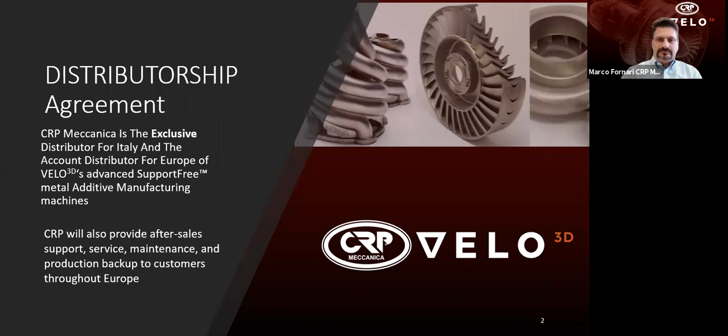A quick brief on CRP Meccanica: we have 50 years total of experience in rapid manufacturing, CNC manufacturing, as well as prototype casting and sintering for casting. We have 20 years experience in the metal additive field, and we are recently obtaining the AS9100 aerospace certification. We are already ISO 9001 certified.

Our history in the metal additive field begins in 1998 with this lovely gearbox that you see here, completely made out of titanium cast with the sintered lost wax molds that we helped co-design with our clients. We had the molds prepared, sintered, and then sent for casting in the United States.

So we've been in the game of sintering and additive for quite a while. The mentality is there. That's why we decided to partner specifically with VELO3D, because they are one of the most cutting edge partners in the metal additive world today, as we had been back in 1998 when we produced the very first titanium, basically 3D printed transmission gearbox case.

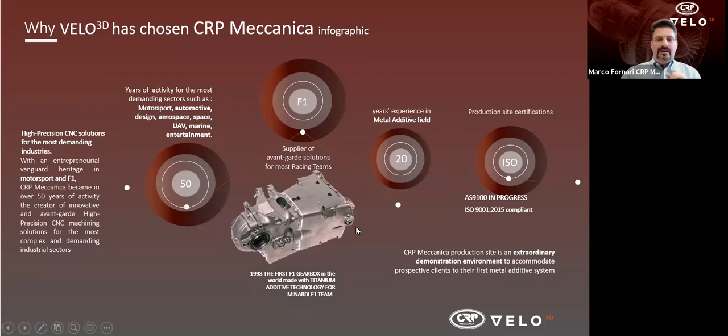As I said, many of our customers are in the motorsport field. You will recognize some devices here, and we've been basically pushed throughout the years into more and more complex parts. As I like to say, we've been forged in pain because the requirements of these customers are extremely high, both in timeliness and precision and performance.

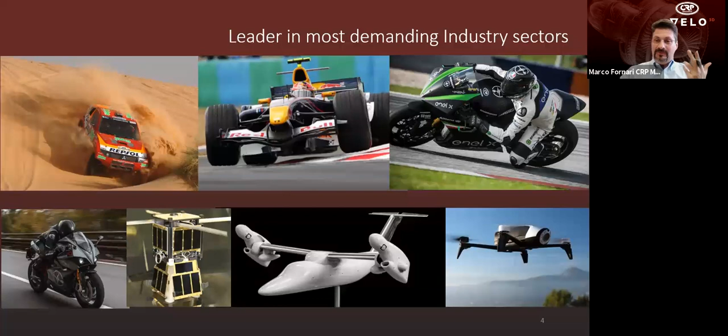A quick overview of our internal capabilities. We were born primarily as a machining company, where today we have a total of 16 5-axis milling machines of the best brands. We have 3 CNC live tool lathes, 2 conventional lathes, 3 EDM wire and sinker machines to complement all the other machining operations. We also have an in-house certified titanium welder, and we have as many as 4 active inert welding chambers where we can weld titanium, which is notoriously very difficult to do.

We employ the best software in the industry with Hypermill, GibbsCam and Cimatron Elite for our CAM software, and Autodesk Inventor and CATIA version 5 for our CAD programs.

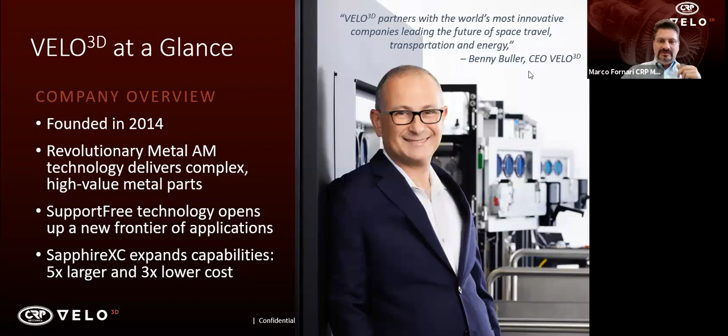And here it is. We decided to partner with VELO3D, which is a relatively young company but an absolute leader in its field, for their revolutionary support-free technology, which will be the buzzword throughout the presentation because they deserve it. We will be discussing their capabilities and what they can do for you.

This is a slide I've been allowed to show to the world because it's been made formal and official now. VELO3D has supplied SpaceX as much as 22 of their machines within the last 3 years. So this is the number one customer that they have, and everybody knows who SpaceX is and what they do.

The engine you see in front of you is the revolutionary Raptor engine used on many cutting edge of their boosters, which employs heavily additive components made by VELO3D. Everybody understands the reliability and the critical parts involved in rocket engines like these, and the choice of VELO3D speaks a lot to their performance.

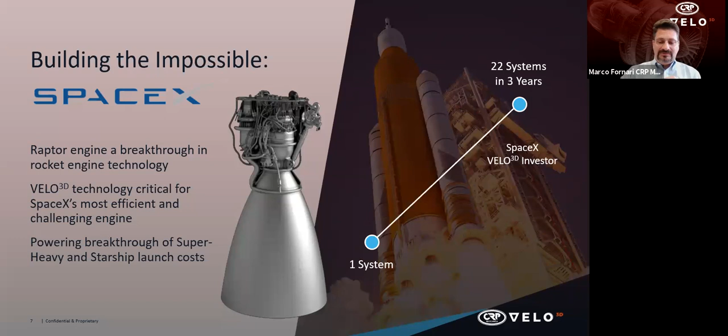Another happy customer is Honeywell, which is in the process of qualifying VELO3D's machines for use in aerospace components. Qualification of these machines is usually very stringent and tedious, and the fact that Honeywell is pursuing it speaks to the high degree of quality and confidence they have in this supportless technology.

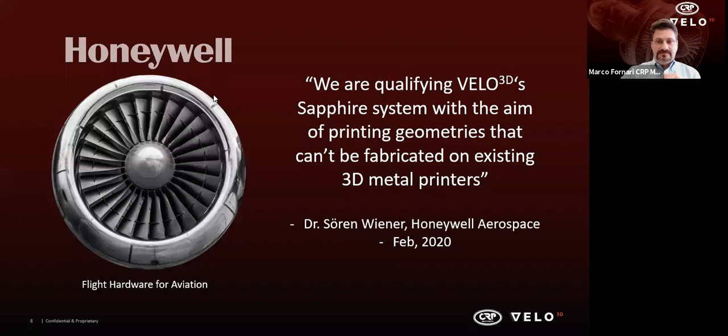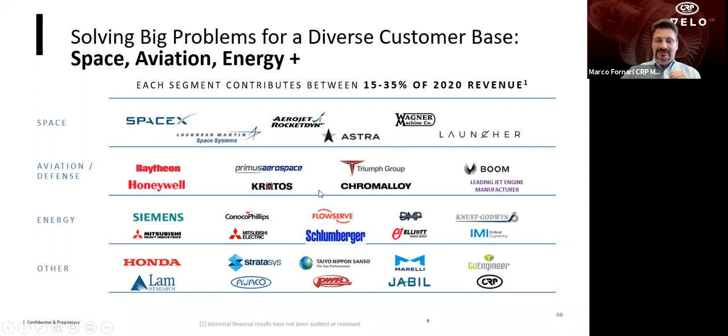And no compromises on design. This is the main point of this presentation, meaning that with the help of CRP Meccanica, we can help our customers understand this new breakthrough in technology and understand that they are no longer limited by the compromises of obsolete and current additive machines, but now they can release their designs far more than they ever have before. There may be some coaching still left to do overall to understand this technology, but now with VELO3D, you can finally afford to make shapes and geometries that were before forbidden to do.

And we have a manufacturing network which is live today, mostly based in the United States, to which we have access. So we can quickly direct all your requests to the appropriate manufacturer with the appropriate materials, with the appropriate machine, of the several machines that we will illustrate shortly.

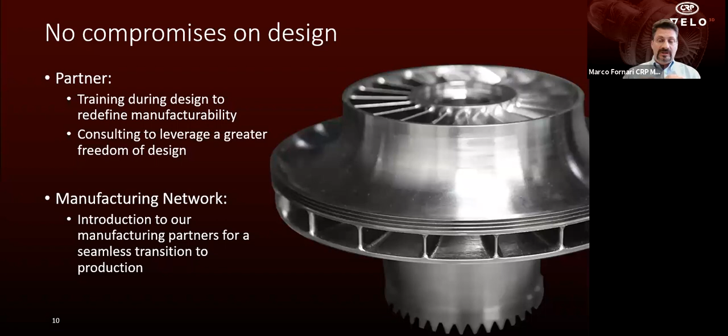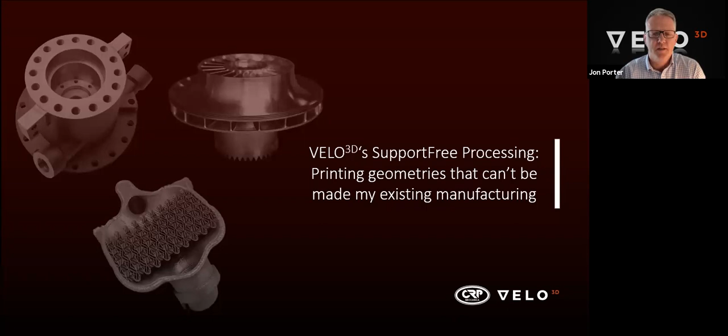Let me move on to the next slide and take a high-level view of what laser powder bed fusion is. I think we're all familiar with the phrase 3D printing, and it's essentially the production of a three-dimensional component through a series of two-dimensional slices. This is typically managed in a manufacturing process where there is a piston inside a chamber, typically in our case a round chamber, and that powder inside the chamber is laid down through a recoating process. Typically we work in the VELO machine at 50 micron layer thickness.

Each layer is then melted in the strategic position of the two-dimensional section you're trying to create using a laser. In the case of our machine, we have 1 kilowatt laser capacity, with 2 lasers working simultaneously. Once that laser has melted that new layer, the process then repeats: the piston steps down, another wipe of powder is put across, and the next two-dimensional section is fused and welded to the previous layers lying below inside the machine.

I'm about to show you a video now, and before we go to that slide I wanted to explain a little about it. There are two items in the video. The first shows the manufacturing of a reasonably large, complex component, stitching together a series of photographic images to demonstrate how quite a large part is built vertically. All you're seeing is the outline of the wall thickness, because as Marco mentioned several times, we're able to build parts like the one shown in the video without any supports, and you can see as the part is generated, there are no supports present.

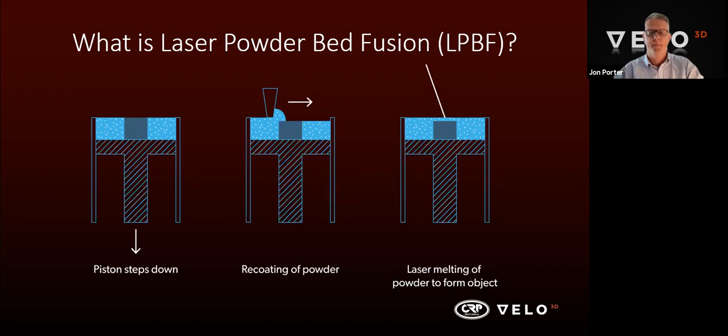The second part of the video is really quite cool as well. This shows our ability to build parts within the AM system, within the VELO system, that are unsupported or not in any way coupled to the build surface or the build plate. These parts are built free-form and standing within the powder, allowing you to build them in layers and subsequent layers on top of one another. Again, it's a unique attribute of the VELO process.

So if we could just take a look at the video, that would be great.

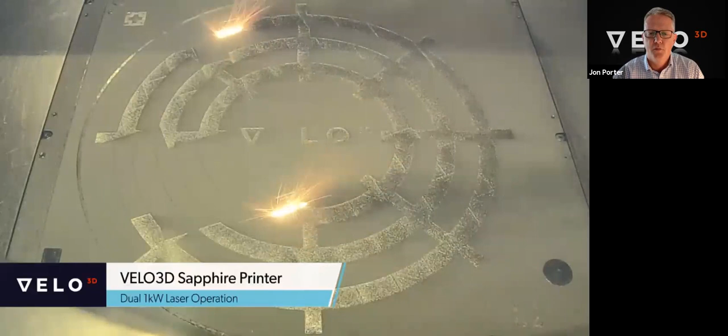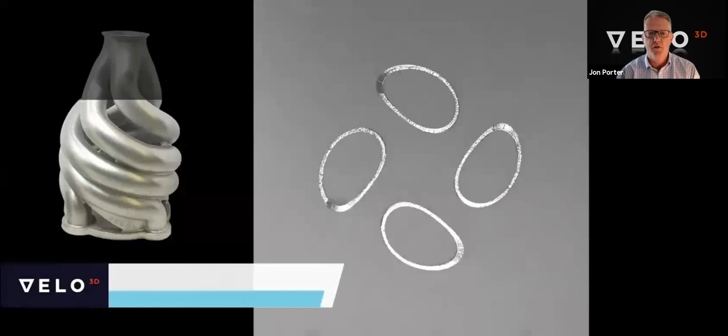Two 1-kilowatt lasers performing the initial build sections on the part I was trying to describe. You'll see now we'll move into looking at this part being built through a whole series of those two-dimensional sections. There is no support. All we are building is the part. We're not building any supports within the process.

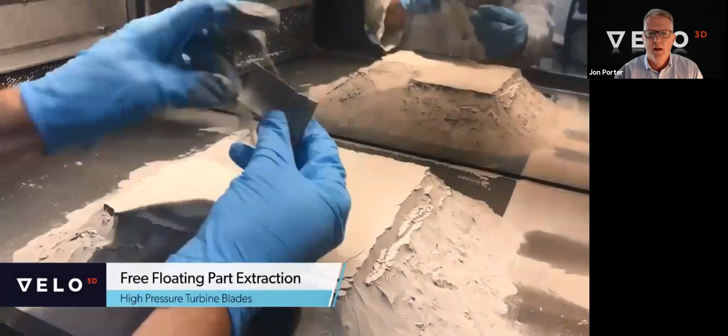Second part that I mentioned, which I think is absolutely fantastic: this is free-floating parts within the build. A high-pressure gas turbine blade, unrestrained, unsupported, just supported essentially by the metal powder that sits around it. A unique attribute of the VELO process.

Supports, we've already mentioned them a number of times, and it's worth explaining why they're needed. The process is essentially rapid expansion and contraction of metals. We're using a laser to melt small sections of powder very quickly, and that presents a range of internal stresses which can manifest themselves inside the part.

So we have a desired outcome, a little archway that we'd like to produce, and if those internal stresses are allowed to manifest themselves inside the part, invariably they will come into conflict with each other. The outcome, without any supports in place, is that the part will fail and deform in the way shown in the central image.

So the way most parts need to be manufactured through additive manufacturing is to put in place supports, or as we could also refer to them, anchors. These are the little items shown in red on the image on the right. They're about anchoring the component down and making sure it remains stable during manufacturing, and these supports have to be added and then removed as part of the post-processing techniques.

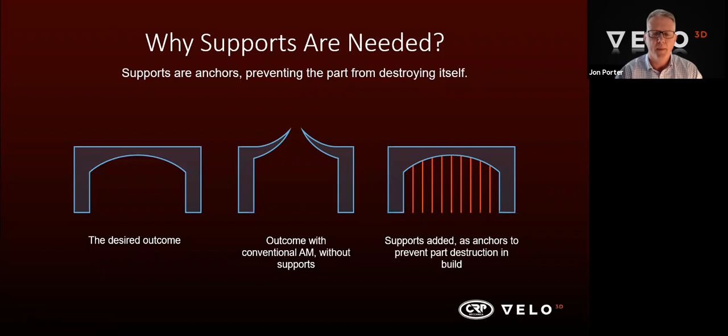So this is really where we start to stand out. Shown in red, you'll see a component like this, a shrouded impeller from one of our customers - a reasonably large component. Conventionally, this part would have to be supported.

Now there's a range of supports you can see there, and you could argue that the supports underneath the component are reasonably easy to get to. Once the part has been produced, those supports are reasonably easy to remove. But you can also see there are supports inside the flow channels, and those are extraordinarily difficult to remove.

Not only is removing them time intensive and labor intensive, but you're damaging a critical flow surface. So it's an undesired outcome in the production of parts just like this.

Looking on the right, this is simply the alternative solution we provide. We would produce that part without any supports in place. There's a small external support on the outer diameter, but that would typically be post-machined away as part of the final machining process. This is a process that could be applied at CRP, whose bread and butter business is producing high tolerance parts.

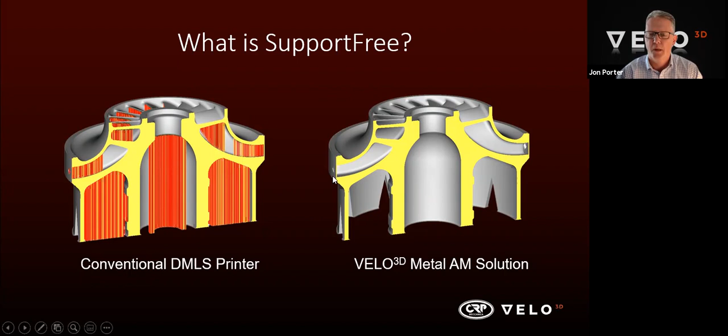So how do we do it? We work with CAD data. Our software doesn't accept STL files, which are normal within this industry - we need step files or CAD data because we need to interact with that data and apply a series of steps within our own flow software.

We have a product called Flow. What it does is look at the component on a feature-by-feature basis, and it applies one of up to about 25 different build profile recipes that we have. So if it sees a vertical wall or a low angle wall, we have a recipe for that, and the flow software will apply it.

As the part is being built, that recipe is in place to build that feature without supports. But as the part evolves, for example going from a vertical wall into more of a bulk section, the recipe will change again. What we're typically able to do is fully exercise the 1 kilowatt capability of our lasers and speed up the manufacturing process because we're just laying down bulk volumes of material in the final part.

This part you see here - you'll see it again later in the presentation - but it's important to point out that the part you see is as made, so it hasn't received any post-processing whatsoever. The quality of the surfaces we're producing, I think you'll agree, is outstanding.

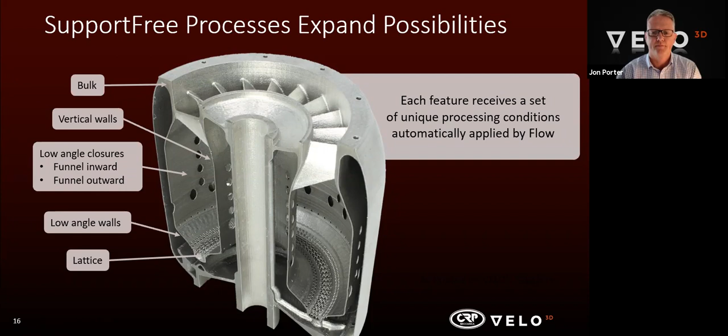So we present our business and refer to it as a full stack. What I mean is that we not only provide the printer, we provide the supporting software around it. It's important to realize, as I've mentioned, that we need the CAD model, and that would be interpreted by our flow software.

What we're essentially doing is prescribing the build process, and that's what the software does. That prescribed outcome is executed and manufactured inside our metal printer, the Sapphire printer, which is shown there. Allied to the manufacturing process are a whole series of sensors inside the machine.

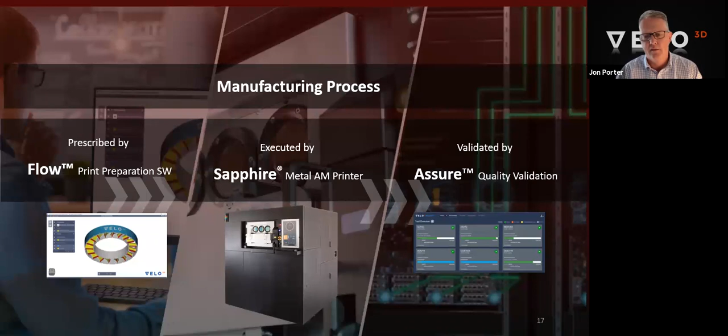So just over 900 sensors are currently on board, including the onboard metrology for the machine to self-calibrate before each and every build. Those calibrated sensors are then used to derive volumes of important information for you to validate the parts you've built. So we have a second piece of software called Assure, and what that does is centralize all of that key manufacturing data into a single point and provide validation of the build.

So we have a standard Sapphire machine, shown in the previous slide, that has a build volume as shown there. We have a round build plate, which is slightly unusual, and it's 315 millimeters in diameter and typically working to 400 millimeters in the Z direction.

Now, what we've also done is taken the goodness from our original machine and stretched it out. So we also have the same diameter build plate, but working at 1 meter in the Z direction. This has been particularly useful for some of our customers, particularly in the oil and gas industry, providing a reasonably unique working space for very long, large components typical of some of the key sectors we're now supplying into.

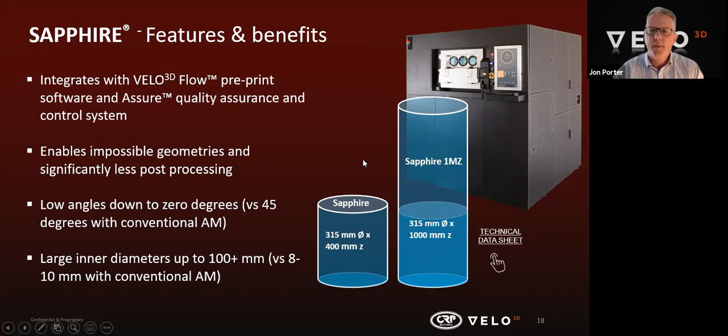If we could just take a look at the next slide, that's great. But more exciting than that in some respects is the future product. We're always excited about what's coming next, and that is the Sapphire XC, where XC stands for extra capacity. It's a much larger machine, physically larger because it has a greatly increased build space internally.

We now have a build plate, remaining round, but it's 600 millimeters in diameter now, and in the Z direction we can manufacture parts up to 550 millimeters. Now we've had to increase the number of other things, primarily the number of lasers. We now have eight 1 kilowatt lasers in this machine, and they improve the productivity no end. In early trials, it appears we're getting an increased throughput of at least 4 times that of the standard machine.

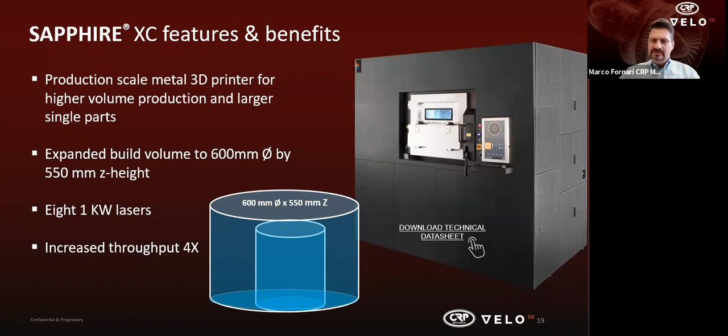Yeah, that is absolutely amazing. I very much look forward to this XC being released, I believe third quarter of this year. It's coming, probably maybe fourth quarter this year into early part of next year, and the interest in the machine has been outstanding. We've received a number of reservations and pre-orders for the machine. I can't go into exact numbers, but it's extraordinarily exciting and we're very happy with what's going on.

Yeah, I can't wait to go see it with my own eyes in California as soon as it's possible. That'll be really an outstanding machine, which takes us to a point: a machine is only as good as the products you can make with them. And a good product needs to be of good quality. How do you track that quality?

So far, many of the additive systems have relied on outsourcing processes just like X-ray inspection. Well...

The VELO3D software package, as Jon mentioned, has this package called Assure. The Assure quality control system is an all well-rounded quality control suite that does several things.

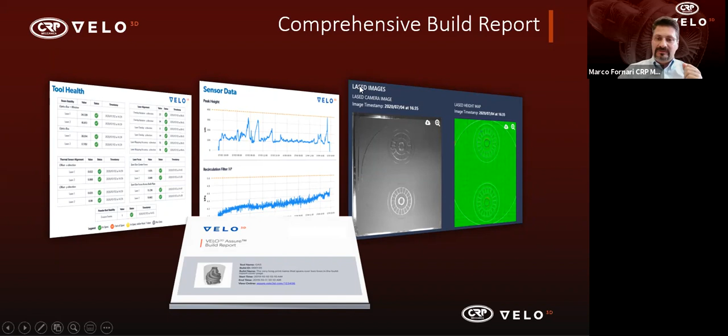This is the height mapping part of it. And then we will go back to the full build report that Assure actually is able to generate for you. So every part can receive a build report, which is fantastic. So back to the height mapper.

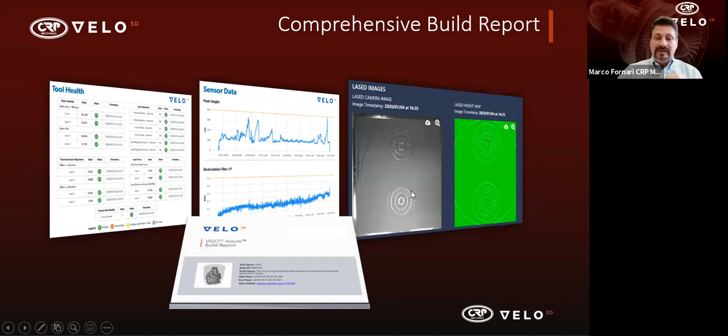The height mapper is a special sensor developed in-house by VELO3D that is able to record in XYZ the powder bed within an accuracy of a few microns, as little as 1 micron in Z and 5 microns in XY. This is an amazing feature that I don't believe anybody else in the market has, a 3D scanning feature of your powder bed. What it does is take a regular camera image and a 3D relief map of your powder as it's being laid, after it's being laid, and after it's being lasered.

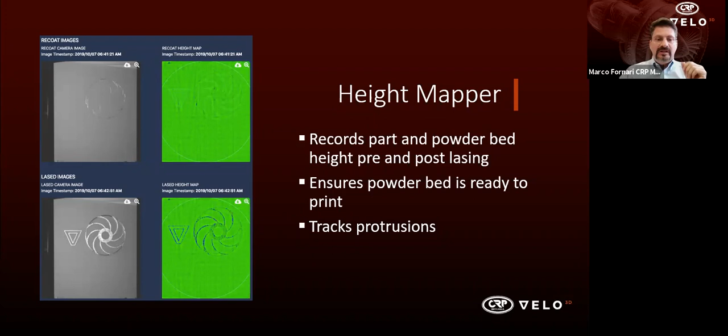And that's why you need so many supports tying everything down. Well, with VELO3D, now you can not only be much more aggressive with your 3D prints without supports, but also you can check the health of your part as it's growing. Every single layer is recorded, and as it's being recorded, a 3D model of the imperfections that may lay inside of your part is being mapped.

At the end, when you want to create your report for that part, you may go and check out the various predicted porosities that have happened in that part, to further adjust your model or your processes for the next part. So this is an incredibly powerful technology.

This is the kind of thing that builds confidence in customers that are maybe a bit on the edge about adopting additive technologies. With a quality suite like Assure, this gives great confidence to designers on the design side, but also to quality managers in the quality department, because it gives you, as I said, as a control freak, great understanding of what has happened in your part as it was growing, so you may change it and better it next time. This is truly outstanding.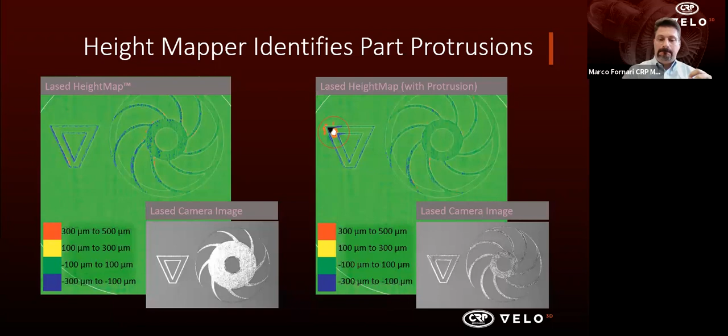Materials. Well, all the classic, most high-performance materials are offered today. So obviously grade 5 titanium, Inconel 718. This is aluminum F357, also known as A357, basically an AlSi7 alloy. Hastelloy X, which is a nickel-based super alloy. And then coming soon, the famed Inconel 625, for which I received a request today, and Scalmalloy, for which I received a request yesterday. So I really hope that Velo releases these two materials, because I have customers literally asking for them as we speak.

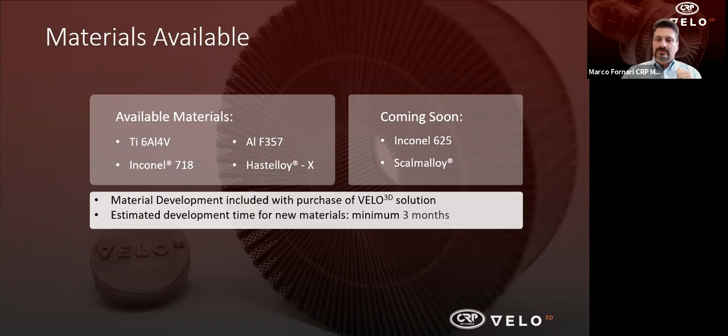The material developments are not finished here, because with the purchase of a system, VELO3D, within a minimum of 3 months, will develop material of your choice within these major categories. So say, for example, you're interested in absolutely high performance parts in titanium 6246 or 6242, which is a high temperature titanium alloy. VELO3D may develop it for you free with the purchase of the system, of course.

Material properties, obviously this is always asked, how dense are these parts? Well, they are usually guaranteed within 99.9% of the volume, so basically fully dense, and better than casting, that's for sure. Geometric accuracy is roughly guaranteed at 0.2% for any linear dimension, but this varies on application, especially depending on the aspect ratio of your component. But this is something that is a bit tricky to quantify with just one number.

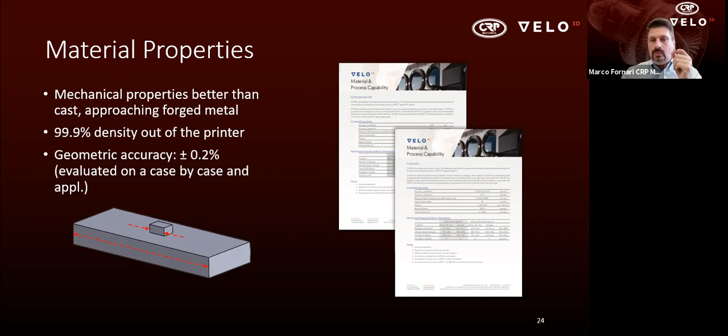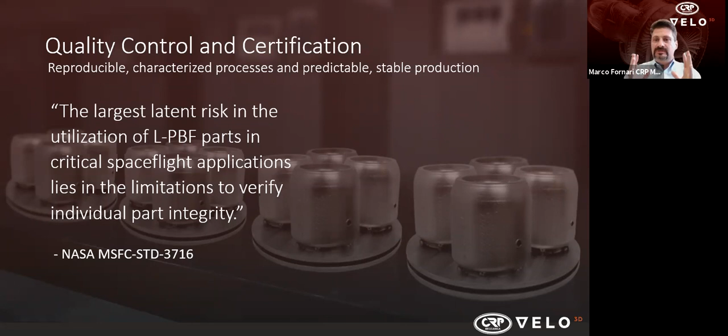So again, to quality control and certification, I love this quote because it speaks to the importance of keeping track of how your part grows. This is especially true in high performance fields like aerospace. The largest latent risk in utilizing laser powder bed fusion parts in critical spaceflight applications lies in the limitations to verify individual part integrity. This is exactly what the Assure system does. It can verify and show you, with its report at the end, the part integrity before you send it off for weeks to get X-rayed or to do NDT at a third-party company. This is truly an amazing feature that I believe nobody has today.

Which brings us to applications.

Great, thanks Marco. Let's talk a little bit about additive manufacturing, because over recent years it's often made promises it maybe can't always cash the check on. We often talk about design freedom and the opportunity to create essentially what we want, but it's not entirely true. We'll often find we have a desire, but the reality of the additive process, along with other manufacturing processes, is that there are still some constraints. So we often talk about design for additive manufacturing, or DFAM. Essentially what that really means is there are some concessions. We need to understand that even when using additive manufacturing, there typically have been some compromises that need to be made.

Actually, one of my colleagues summed it up rather nicely in an earlier presentation I saw. He used to be a manufacturing engineer, and as he said, he used to be in the business of making design engineers cry, because he would often have to have a conversation where the design couldn't be met by the manufacturing process. But really, we need to think about how we go forward.

So until now, that's been the case. But right now, we need to consider using Velo to skip that step.

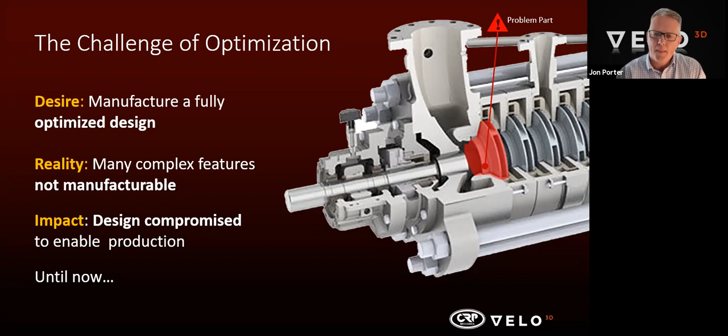So if we look at the next part, it's a heat exchanger. Fairly typical of the industry, I understand that. We're not unique in our ability to make these, but we've had huge success. We can build very, very conformal parts with our machine. This is a customer we have down in Australia. With all the inherent properties of the materials and the ability to flow liquids through parts with very low pressure loss, you create parts with really exciting performance improvements.

Fine features is something that we're very good at as well, to have leak-proof walls inside a component like this, typically down to about 320 microns, but that's typically constrained by the material. So it's aluminium in this case, but we have some pluses and minuses on the leak-tight walls we can produce based on the material we're manufacturing with.

And it's fair to say there's a little bit of honesty here in some respects. I'm showing in the background there a part with some supports. Look, if they're easy to remove and they provide more guarantee of build success, then that's fine. There are still forces in this process that need to be managed. We can do it in a number of ways, and one of them still is to use some supports. If they are easily removed, then why not?

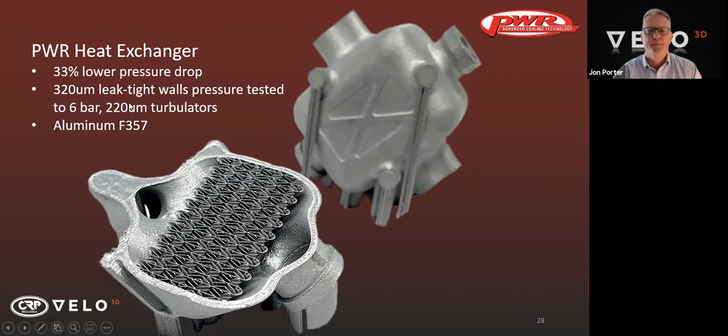The turbine part that I showed a little bit earlier on - just to give some validation and quantify some of the improvements we made - we worked this project with a company called Sierra Turbines in the US.

And these are the sort of improvements these guys were seeing. Not only were they consolidating 61 parts into this single item, you can see there's a mesh section, there's a lattice section at the bottom there. There are horizontal surfaces, vertical walls with holes straight through them, and it's allowed us to produce a part for those guys that is 10 times more power dense. More importantly, in terms of the service life of the component, it has a much higher degree of durability, by 40 times. So it's a massive series of successes and wins for a company like this. It really starts to open up the ability to build in a much more unconstrained way using this fantastic technology.

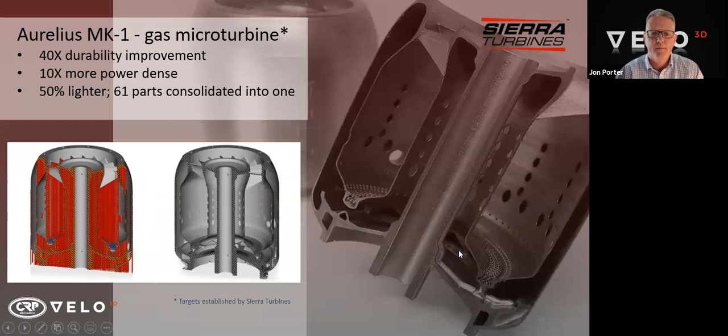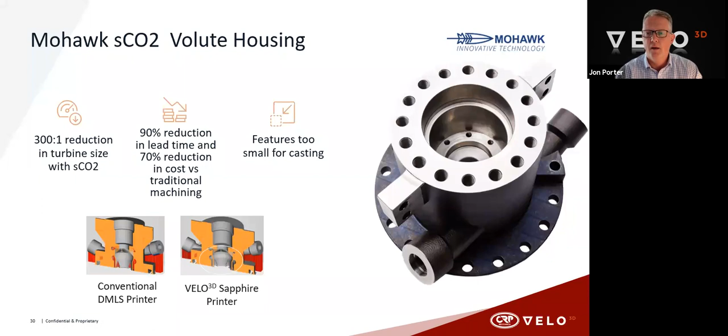So we don't have the opportunity to do that. But if you look at the solution that we provided and the part that we've built, and is now in full test - and we've got separate seminars that you can dive into on YouTube to see this - that volute section is completely support-free, and it's critical to the function of this part. This is fundamental to the success of this new piece of technology, which is all driven by the new energy sector that we're having to actively develop very, very quickly to manage the way forward.

So taking a look at the next slide. We've already seen images here as well of the part that's now being made for Hanwha, a large shrouded impeller. We've accelerated the development time - time compression is something we always talk about in additive manufacturing, and this is pertinent here.

Typically they had a design that they just really wanted to continue to make. The volumes were right, but they didn't have to do any critical redesign of the component to make it successful through our process, and that's quite interesting as well. So we're able to do with a Velo machine a lot more direct part replacement than I've ever seen before in my experience within this industry.

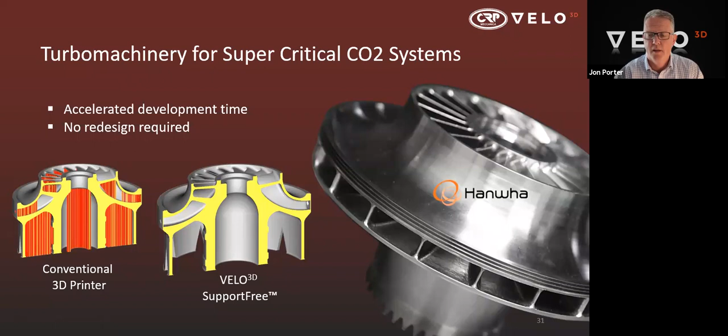Typically, to use additive, you tend to have to design immediately for it to make it successful from an economic point of view and from a performance point of view. But there are also opportunities using Velo to do direct part replacement. So if you have very low production runs, very low annual quantities, there's an opportunity for us to build those parts for you.

Another new part, a perfect marriage in some respects. This is part of KW Micro Power, another gas microturbine business. This is really, really quite an interesting part. It fits as part of the exhaust section of the product that they make. Now this gets particularly hot, and when it gets hot, the magnets that are embedded in the system start to deteriorate in terms of their overall performance and power.

So what this part really needed was a cooling jacket. And what we have been able to do is design and build this part with that cooling jacket in place. Again, if you were building this conventionally, that cooling jacket would need to have some amount of support in there for it to complete the manufacturing process. But the Velo solution is not to have any of those supports, so that cooling jacket is fully formed and is allowed to flow.

Now, the interesting part here is that what we use to cool this component down is the fuel that's going in at the other end of the microturbine. So the irony here is that we're pumping fuel around this cooling jacket. The component itself is being reduced dramatically in temperature from about 170 degrees C down to room temperature, and at the same time the fuel is being warmed. So the fuel is being primed for use, and that is a true benefit to the combustion cycle of the process of the product. So it's a perfect marriage in that respect.

We have a part which is now cool. Magnets inside now perform at the required amount. The fuel that's required at the other end of the same device is now preheated and warmed and is more readily to burn.

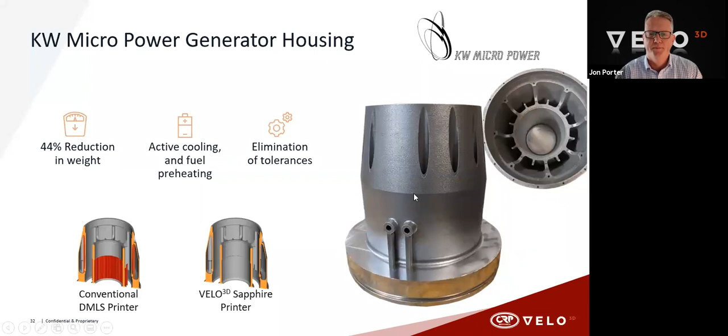An exceptional piece of work. I've been in this industry for a number of years, and I never thought I'd be able to talk about a part like this. A fully contained fuel vessel is pressurized, and you can see the images left and right there, and you can get an impression of scale there with the image on the right.

But to build an unsupported dome like that, this stands alone. Only the Velo system is able to do this. So we have these critical recipes, these critical build parameter sets that allow us to build through into a perfect horizontal position. So we have an opportunity here again to move the technology and this manufacturing process into the manufacture of parts that truly cannot be made by additive manufacturing, if that makes sense.

So we often talk to our customers about the components that give them the most pain and the most heartache, or even with their original knowledge on additive, there will always be parts that will sit outside their ability. And that's where we fit in. We take additive to a very much a different level. And again, we're reducing weight, we're turning around the time it takes to process these parts is plus, plus, plus.

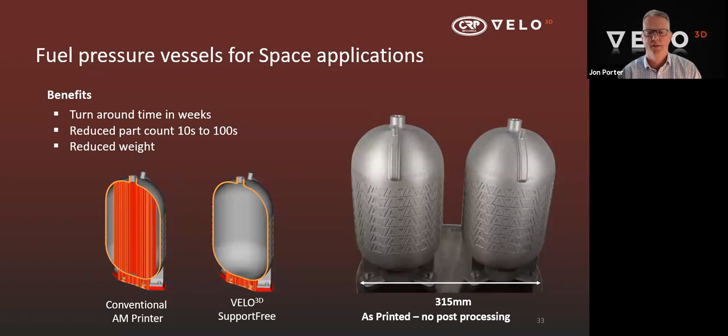A really interesting part as well. This was also done for KW Micro Power. This is a 250mm round diameter part. This was the first part we helped them develop, and this has led to the subsequent business that I've already mentioned in one of the previous slides.

Titanium part, large diameter, and the opportunity working with Velo is to build a part like this flat down inside our machine. We don't have a heated build plate, and this part was sort of moved around the industry for various companies to consider and to quote against, and it was just a no-quote item. And we were able to produce it.

So you can see again, you can see the blue highlights on the left-hand side there. This has through channels which helically run from the internal diameter to the outer diameter. These are all fully formed without any supports inside. Fantastic part. And again, some post-processing required there, but just typically machining. So some drilling and tapping, and a little bit of turning on the ID there.

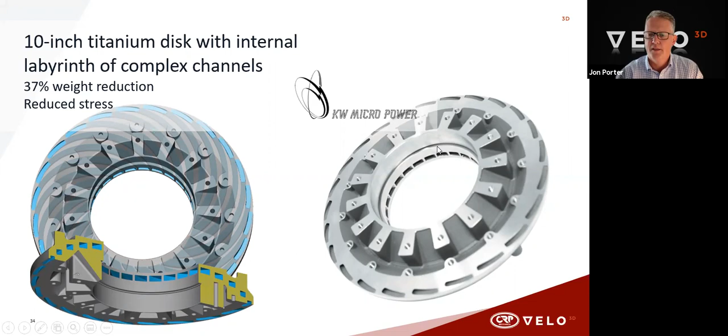But I'm sure that's something that Marco and his team could support you on if you had a part similar to this. Easy peasy. Brilliant. Let's take a look at that.

So a lot of unique capabilities. We're very happy to consider designing without limitations now. It's often been promised with this industry, with additive manufacturing, and I'm working with Velo now as I see this. I believe there's much more to be true right now.

We can help you produce performance parts quickly, effortlessly. And we can make those parts for you, and we can make sure that they're valid and make sure that the parts are exactly what you require. So we can validate the part.

The genesis of our machine is from the semiconductor industry, and that's quite interesting. So we've applied a lot of techniques that are used for making hardware in the semiconductor industry in the way that we've manufactured our machine. So if you can appreciate a business that in the semiconductors, where they are typically building slice by slice, layer by layer, when they're producing silicon wafers, the adaptation of that philosophy and that sort of way of working has come all the way through into our product.

And it allows the machine just to have that high sense of capability and that high sense of repeatability. And all of that provides you with assured quality, a much faster deployment, increased reduction in time in the overall development cycle. And more importantly, is that the post-processing time is dramatically reduced. If you don't have supports to remove, then you are moving into a space where your additive process is starting to produce a product. It's not just producing a part, it's actually producing something that's far, far closer to the finished product.

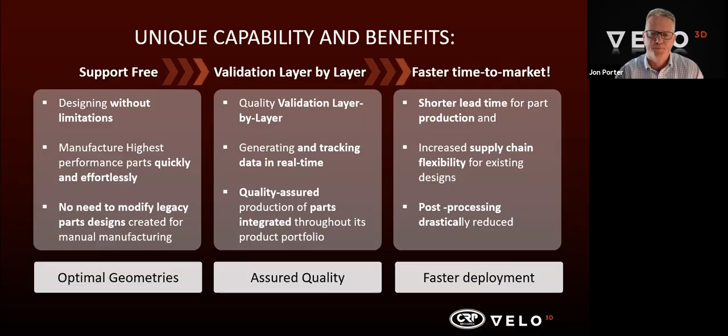Do you need the special powders? Are the powders similar to conventional SLM? Do you have material data?

It's very interesting, the assurance system. Does it have a closed loop principle in order to correct any defects in progress? So, well, interesting. It used to.

Maybe 2 or 3 years ago, the Velo machine was able to run in full closed loop, so we were able to manufacture under those conditions. But the reality is that's not appropriate for nearly all of our customers. Our customers are typically working in very highly regulated spaces, and regardless of the machine being able to identify changes and adapt to them, they're more interested as manufacturers in building parts the same way each and every time. So you could argue they accept a degree of failure in some respects, but what's most important to them is being able to build the part exactly the same way every time.

The requirement for perfect 3D nesting without supports is that you may begin printing the part from a point. So this blade was grown from this point up. You may not choose to print it like this, where an entire edge - a very long edge - would be the first thing that appears to be printed. But if you can start from a point, depending on your geometry, of course, and make it grow as such, then you can successfully 3D nest without supports.

And build in layers - so you can build subsequent parts in layers above. That's immense productivity that's unmatched by anyone else in the industry. But yes, geometry dependent, but absolutely. So potentially all the materials that can be used in a PBF process can be produced support-free. Yep, the materials that we mentioned in the presentation, absolutely - we would be doing ourselves an injustice if we did it any other way.